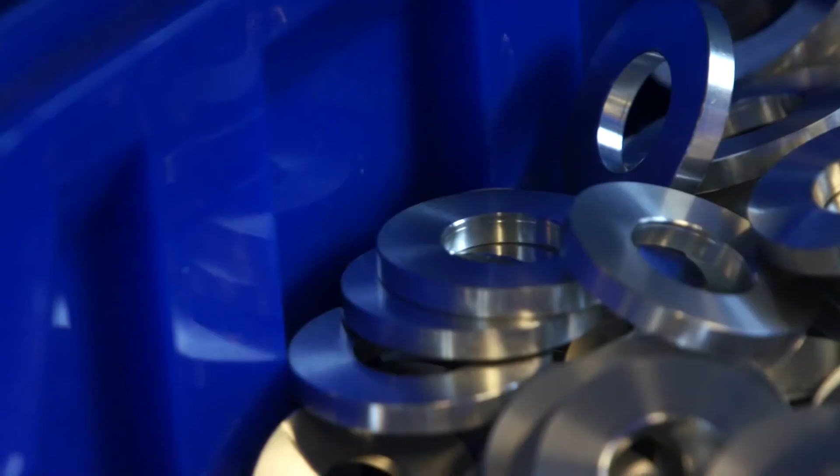In the factory of Hyperpro we make all kinds of products. We go from springs, progressive springs, to shocks, easy shocks, to steering dampers, progressive and linear, a safety item. All the parts we make, we produce ourselves, as you will see in the factory. We do have the all-road, the road, racetrack and also off-road shocks.

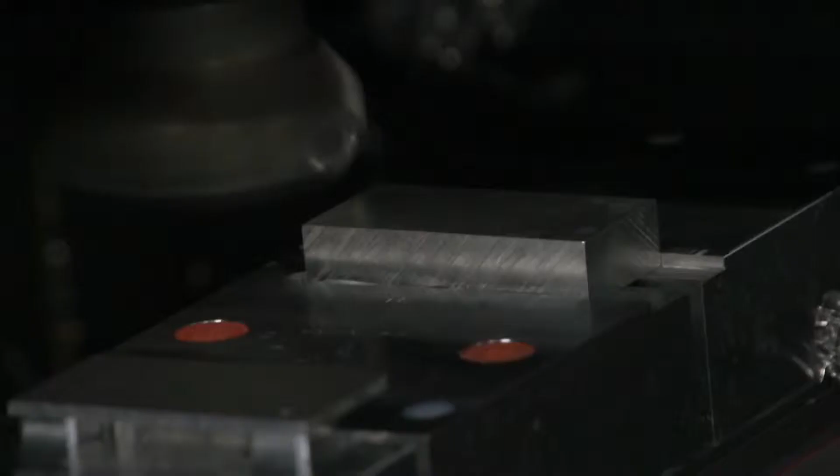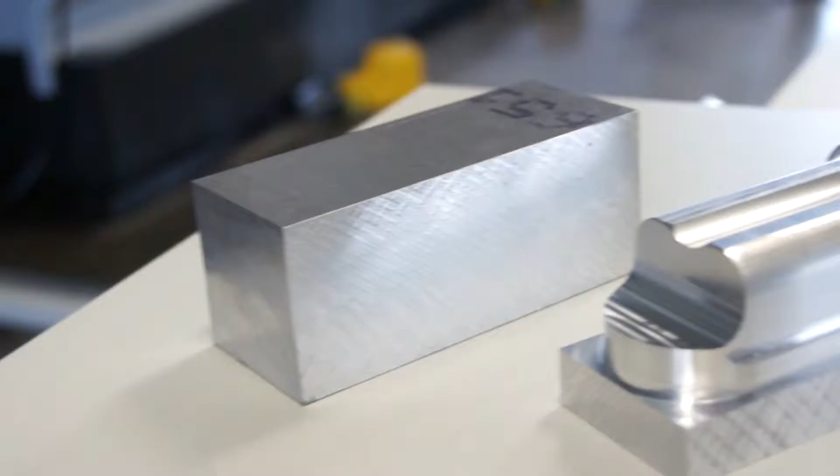Here we are in the warehouse of Hyperpro. Hyperpro has a lot of springs. We have like 1500 different springs for more than 2500 bikes. That makes a stock of more than 30,000 springs in total.

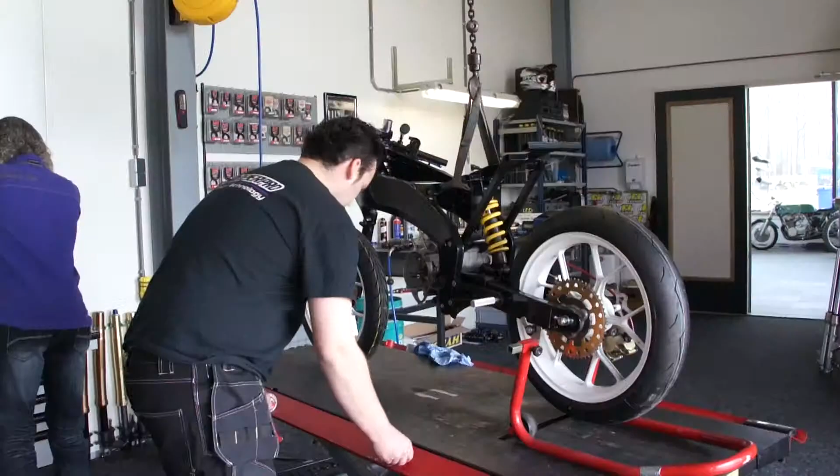Not only fork springs, but also springs for your OEM shock, rear shock. Hyperpro is delivering, of course, the progressive spring, but we also have a large program of linear springs for every bike. The tube where everything is working in and through.

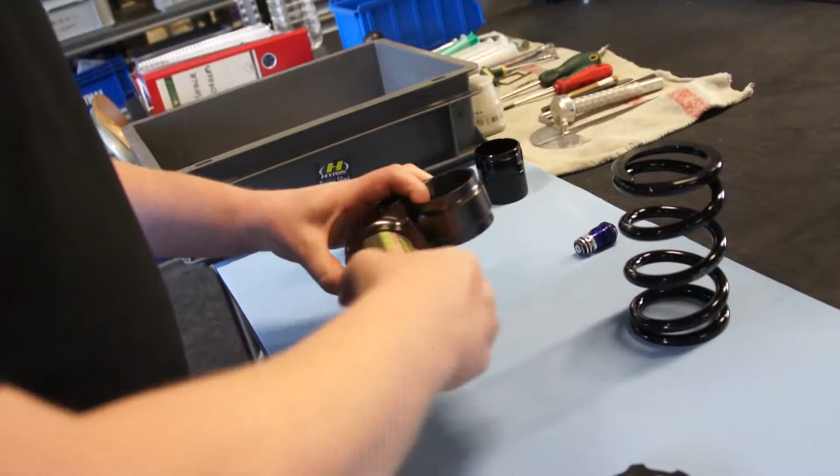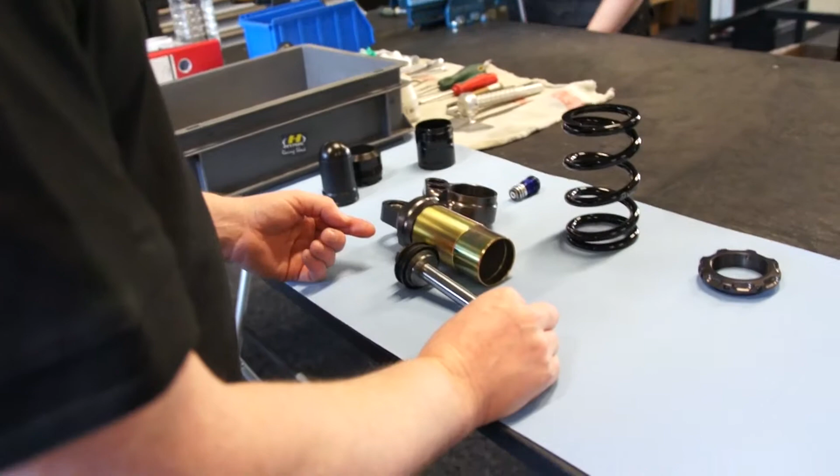The piston with the dampening section, which is moving on that. The piston is actually moving inside the shock, up and down. When the piston is moving up and down, you get a certain oil flow. When the piston is moving up, the oil has to move from the top side to the low side, and therefore it can go through the adjuster,

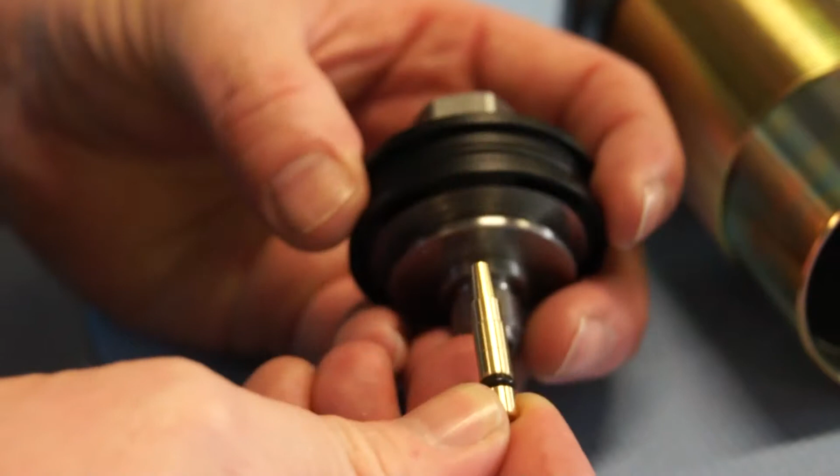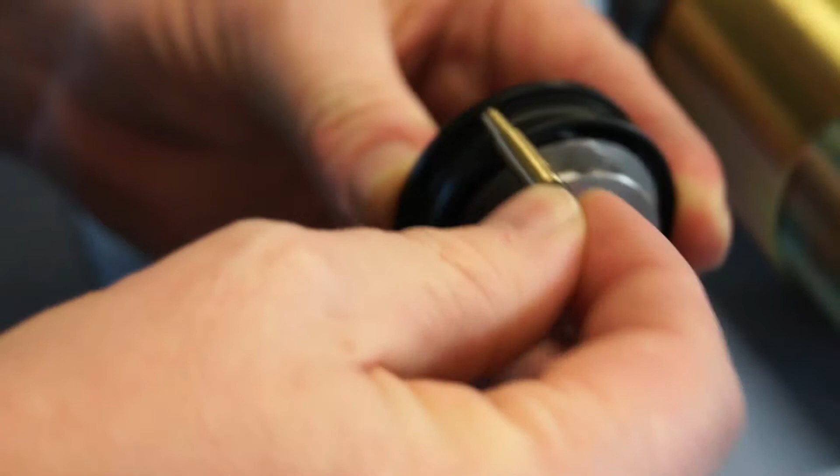which is influenced by the needle, which is sticking more or less inside. The needle is going inside the hole there. When you close the rebound completely, you also put the needle completely in, you allow no flow of oil to go through the hole, so everything has to pass through the shims. When you slightly open the rebound more, you allow more oil to flow through the hole besides the shim stack.

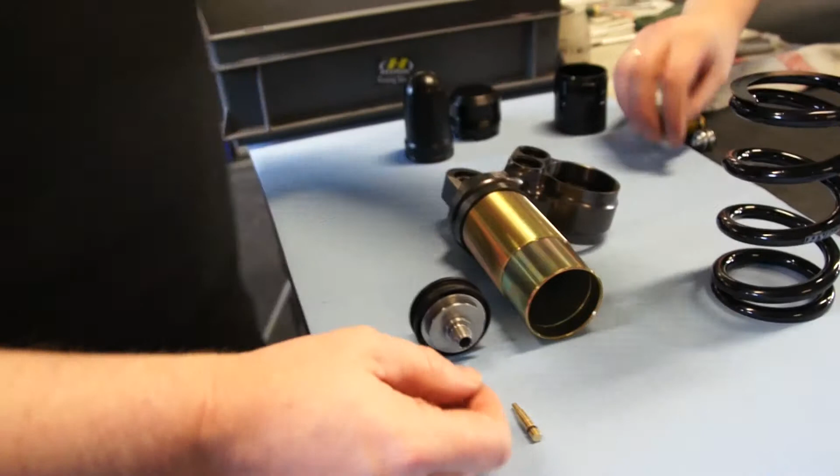So the amount of rebound you have is determined by the shape of the holes, the strength of the shims on top, how many are there, how thick are they, what is the dimension of them, whether you allow the oil to push up the shims, more easy or less easy.

So the other oil flow is when the shock is compressed. Also the rod is entering into this tube. This means the volume here is getting less because the rod has to enter. So not only the oil is flowing from this direction to that direction, also the volume of the spindle rod has to go somewhere. But the volume of the spindle is going towards the bladder.

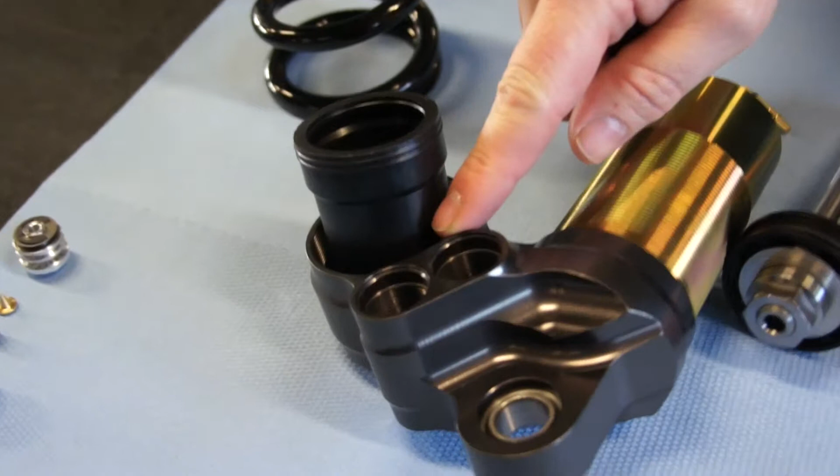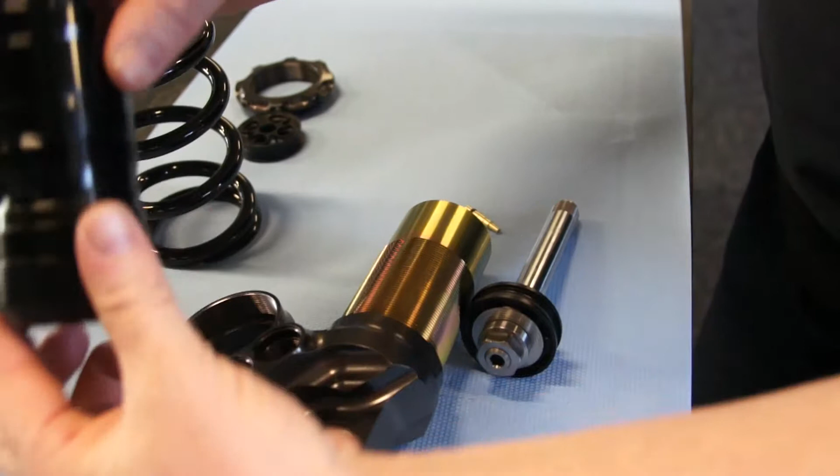It's going through the high and low speed adjuster, and then it will compress the gas which is held in the reservoir there. The bladder has been held in the cup, which will be around this. And the speed with which I allow the oil to go in that direction is controlled by the high and low speed adjuster. Low speed adjuster is a needle.

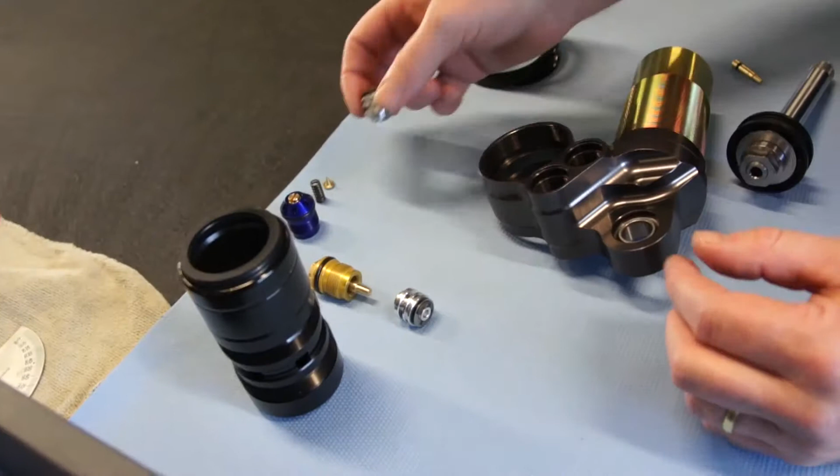It's going inside a hole. Of course, if the needle is going out, I have a large opening. If the needle is going in, I'm reducing that hole size. So therefore I will keep the oil from moving too quickly. At the high speed, I have a valve which is going inside the hole, and the valve has been held by a spring.

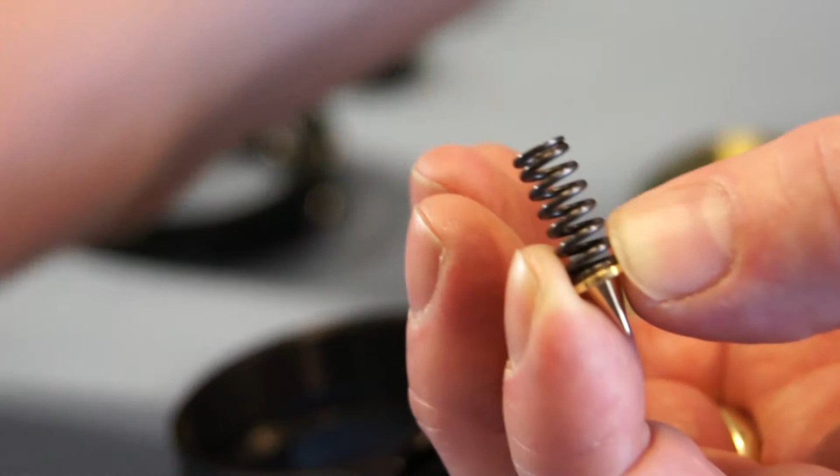And the spring I can compress more or less. When I screw the adjuster in, I put more preload on the spring, and therefore the valve will have a higher force before it starts to open. Compression damping is growing until a certain point, and then after a certain pressure the valve will start to release and I get a change in point.

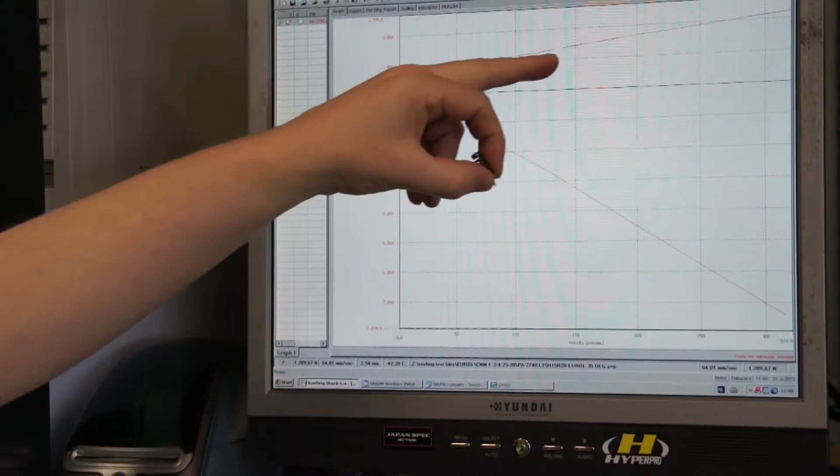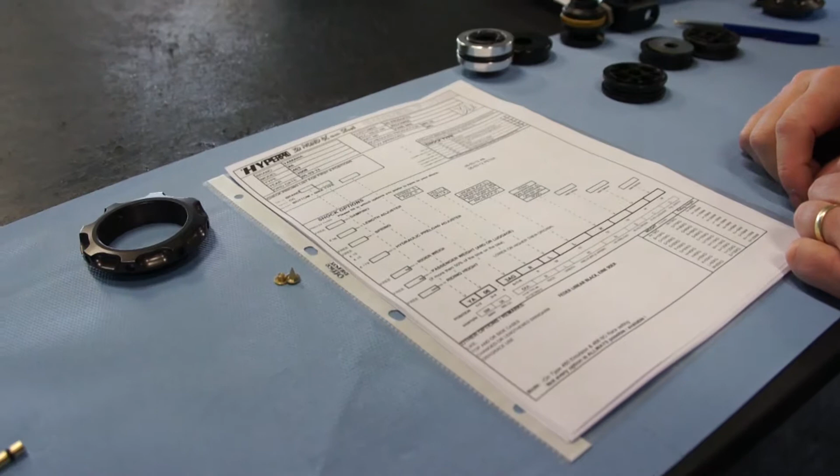Now if I want to have more high-speed damping, I have to put more preload on the valve, and therefore it will open later, and therefore I will have more compression damping. What's the big difference between a mass production shock and here a shock personally made for me from Hyperpro?

As you can see, we have no shocks in stock. We make a shock per order. This means if somebody orders a shock, we will take notes of what kind of shock they want to have, for which bike, which model, what setting they want to have, what extras like length adjustment or kind of spring, hydraulic preload, harder or softer, longer or shorter.

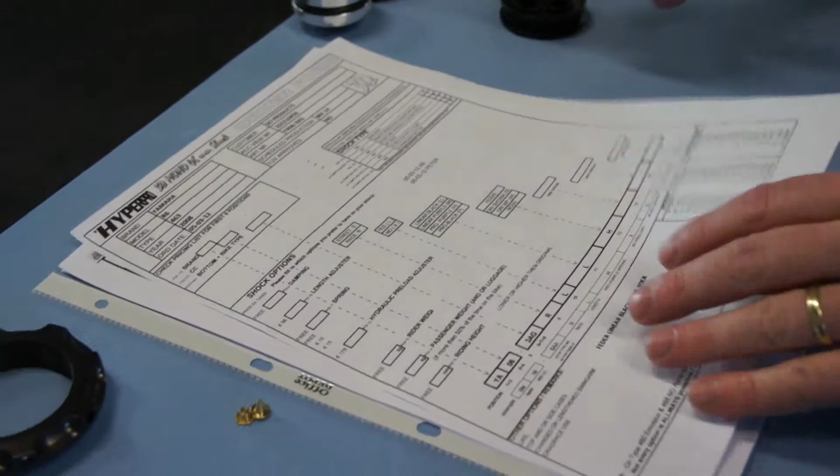From the sheet we will make a paper on how to produce the shock, including a quality chart on checking all the parts. We will make a special spec sheet which states which parts have to be inside with what setting. So every single shock is being produced by hand for the specific customer.

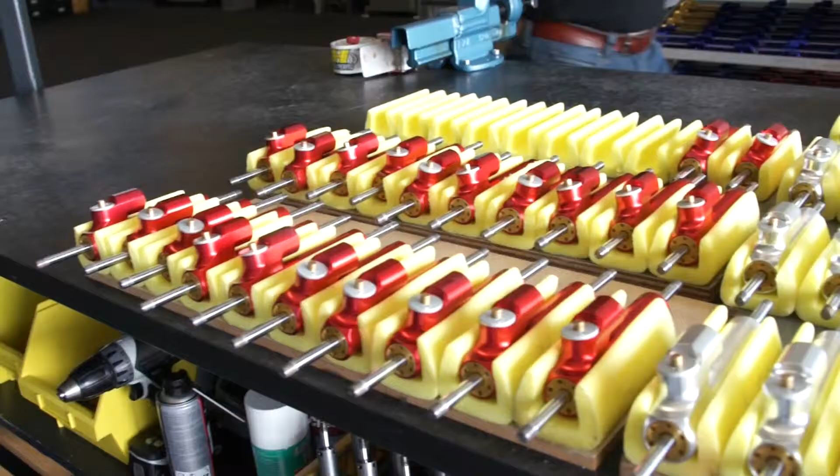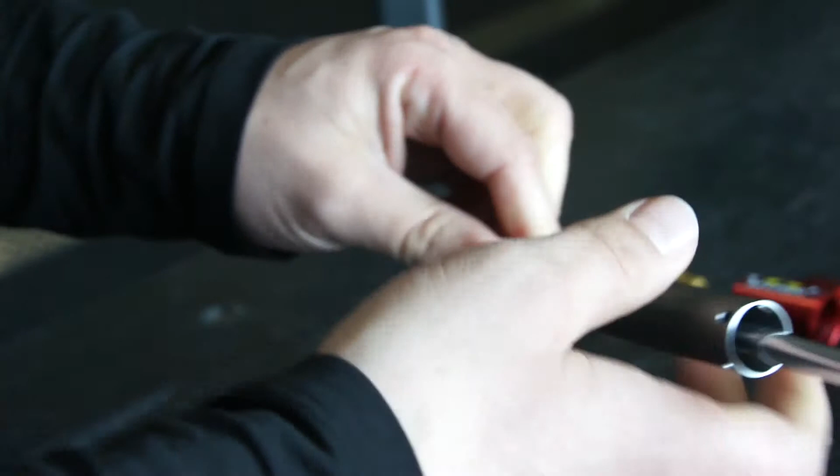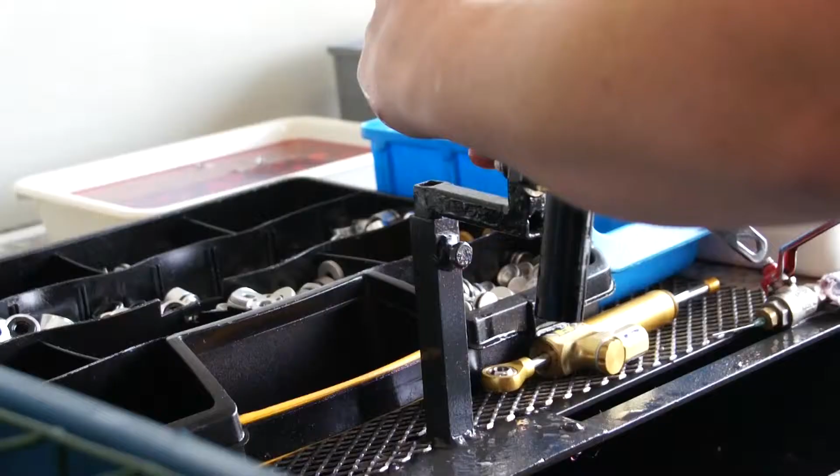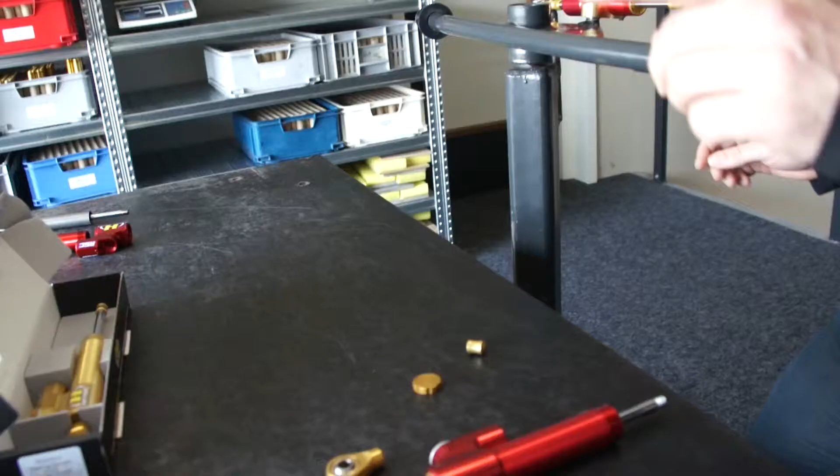Once the steering damper is being vacuumized, it will go in the cleaning machine to get all the rest oil out of it. We make the parts complete into one steering damper. Every steering damper we have will go on the test bench to feel if every click is working, if the dampening is left and right the same. And we do it for every single steering damper.